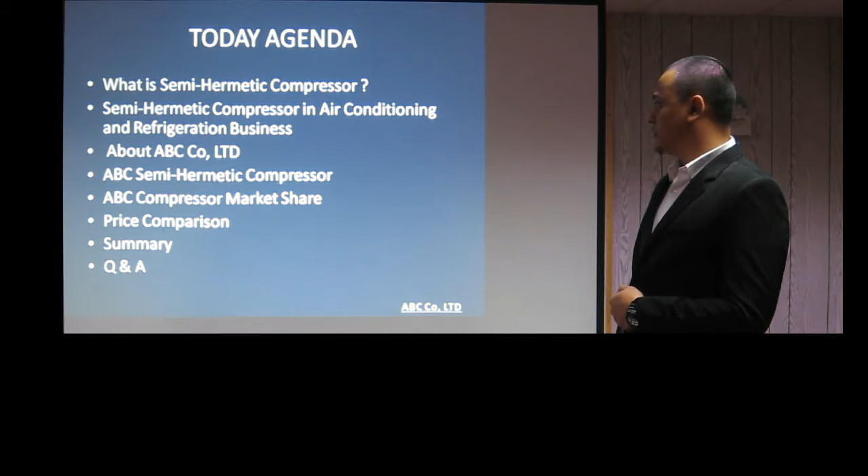Before we start, this is today's agenda. First, what is the semi-hermetic compressor? Second, the semi-hermetic compressor used in AC and refrigeration business. Next, what is ABC Co, LTD? And what is the benefit of the ABC semi-hermetic compressors? The next one is ABC compressor market share, then a comparison between ABC compressors and the competitors. And the summary, and last, we have the question and answer session. Okay, shall we start?

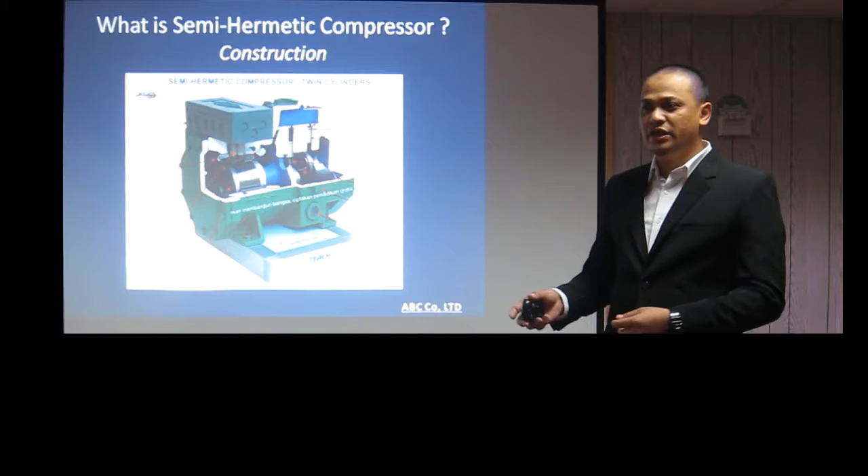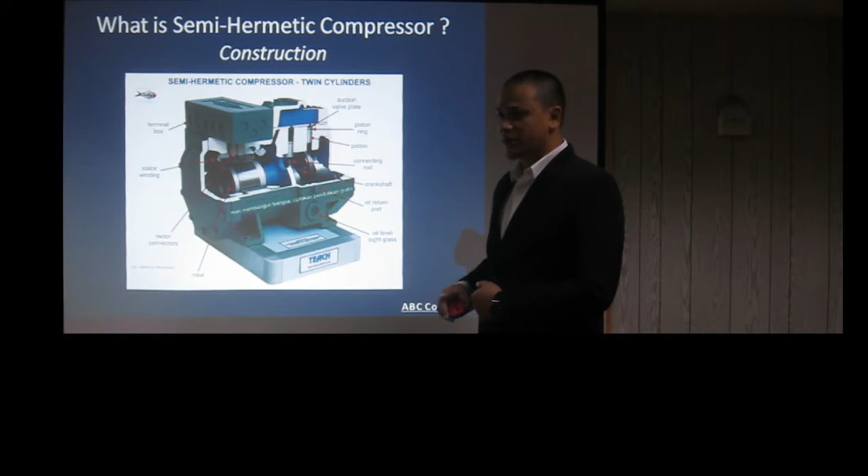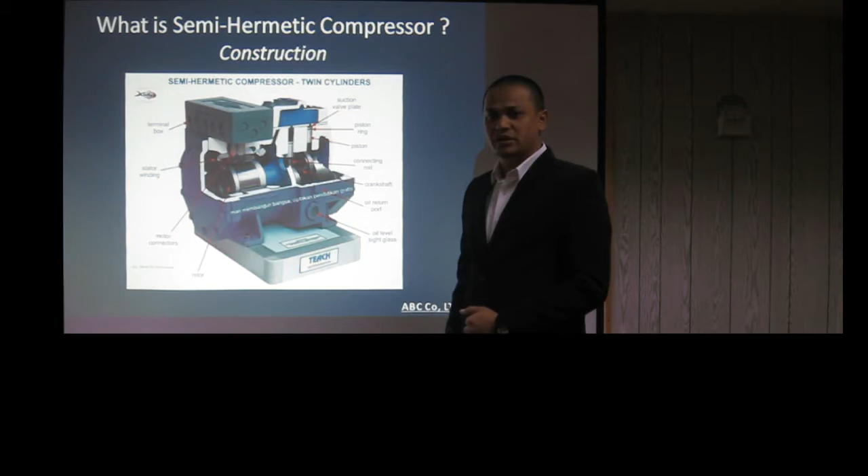Now I want to discuss what is the semi-hermetic compressor. This is the construction for the semi-hermetic compressor. Basically, semi-hermetic means the compressor's mechanical parts are attached with the motor, which is in one housing, and the housing is bolted, whereas another type of compressor is welded. So what we have here is the valve suction, the piston ring and piston, which is the mechanical part, and we have the oil sump. The other side is the motor, the driven motor for the compressor. That's why we call this one semi-hermetic.

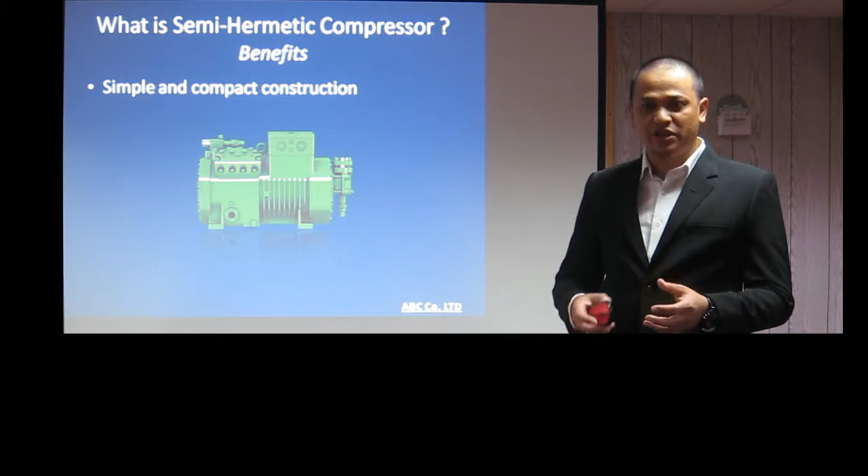What are the benefits of the semi-hermetic compressor? Of course, there will be some benefits. One is the simple and compact construction, because everything is inside one housing, so it becomes simple and compact. It doesn't take space for installing the compressor, unlike another type of compressor where the compressor and driven motor are separated. We have simple and compact construction for the semi-hermetic. This is one of the very good benefits of this kind of compressor.

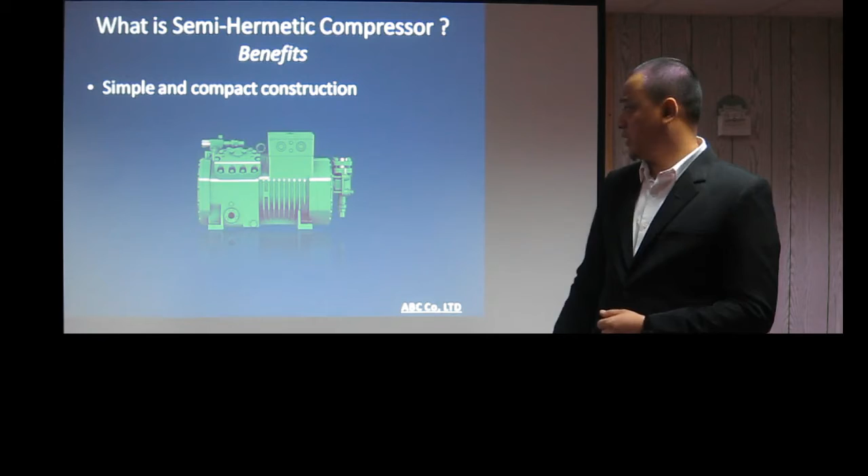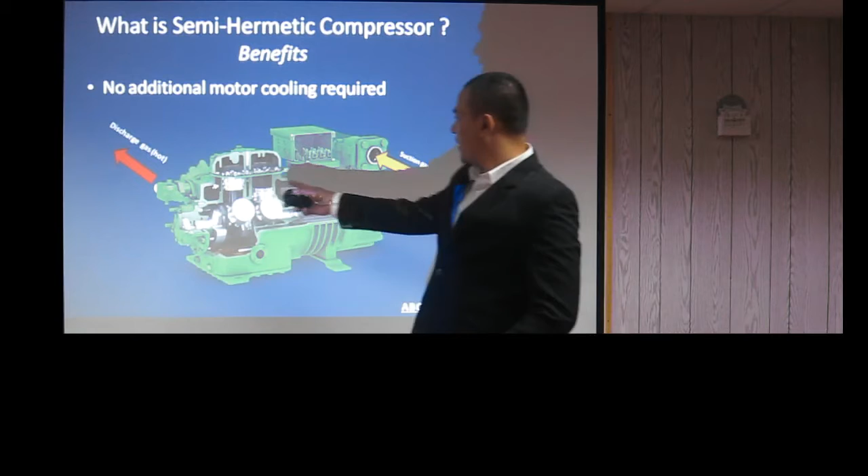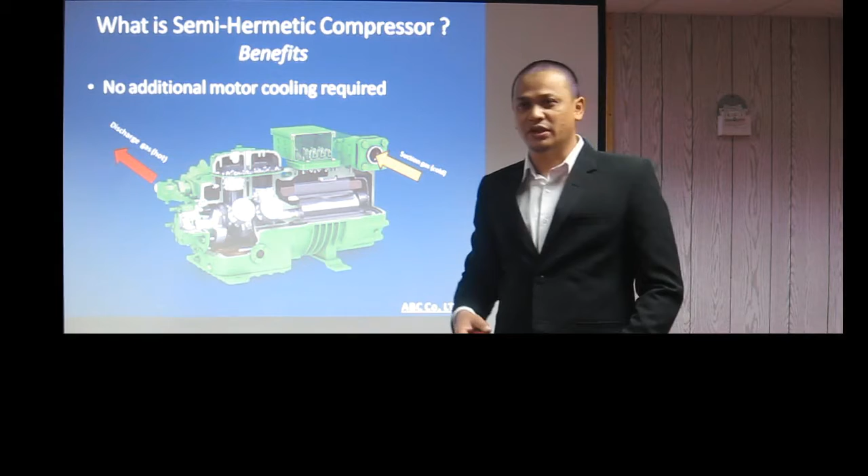The next benefit is no additional motor cooling required. As you know, for compressors where the driven motor is installed separately from the mechanical part, the motor will need additional cooling. But for semi-hermetic, this additional cooling is not required. Why? Because the suction gas, which has a colder temperature, enters first from the motor side, and is pumped by the pistons through the mechanical parts, going out as discharge gas at a higher temperature. The cold suction gas cools down the motor winding at the same time, so no additional cooling is required.

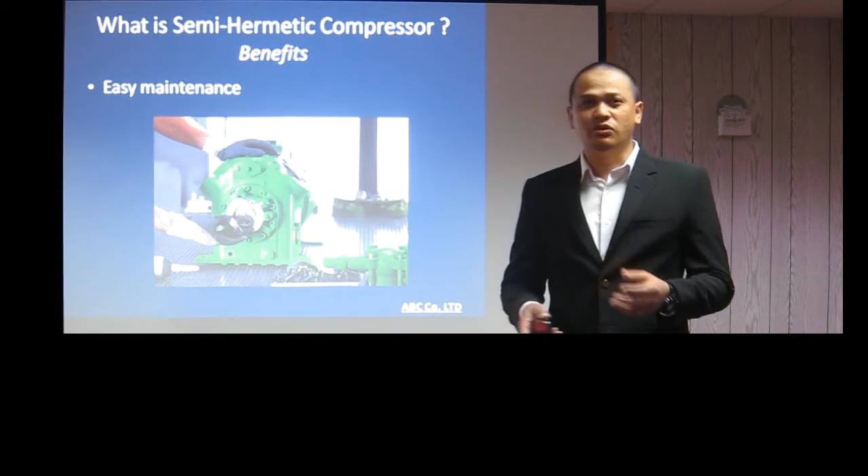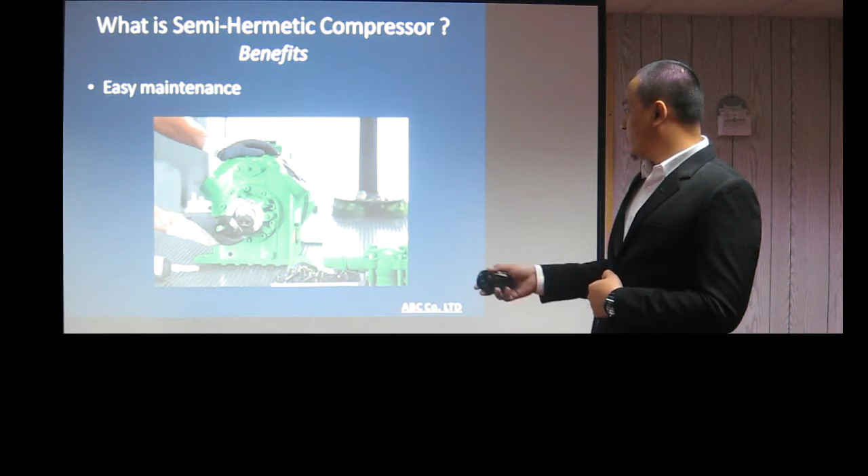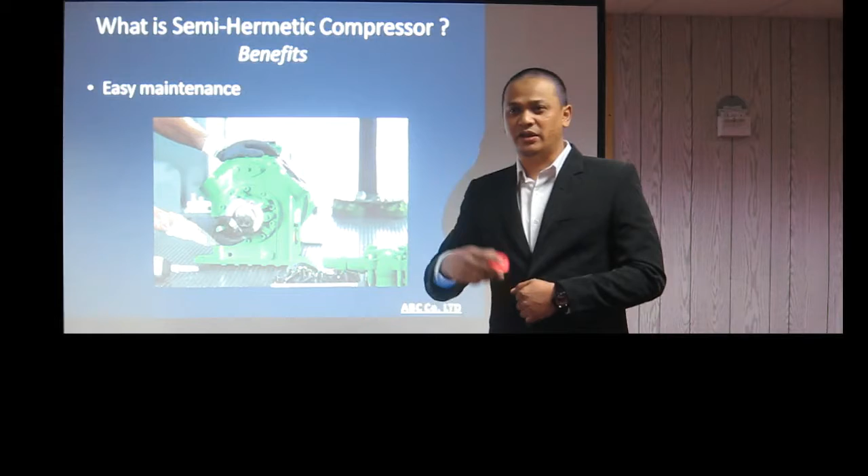The next benefit is easy maintenance, because the housing is bolted, not welded. You can do the maintenance very easily, just removing it like a valve or something else. As shown in the picture, this man is doing the maintenance. They are removing the oil pump side, even the pistons and the ring, he can replace by himself.

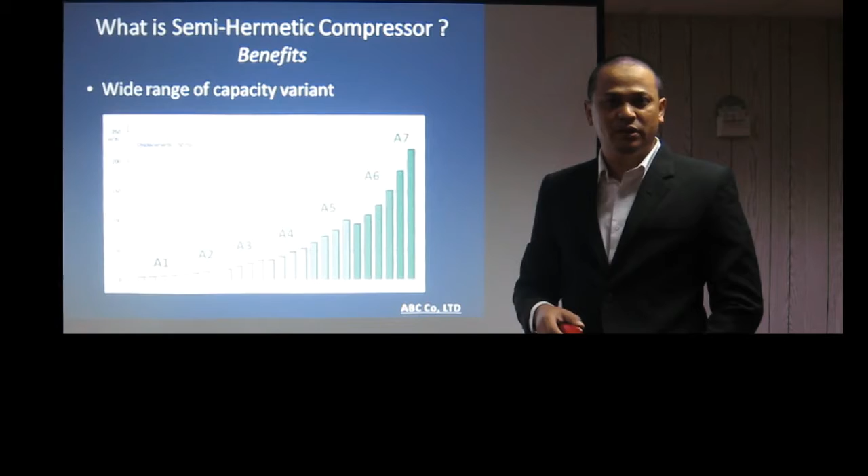The next benefit is the wide range of capacity. In ABC, as well as other compressor brands, this kind of compressor has a range of capacity, shown by its displacement. Here, displacement at 50 Hertz starts from around 10 up to more than 200 meter cubic per hour, because in the refrigeration system, displacement represents the capacity as well. More gas, more refrigerant pumped by the compressor gives more refrigeration capacity. We have several types here, from A1 up to A7.

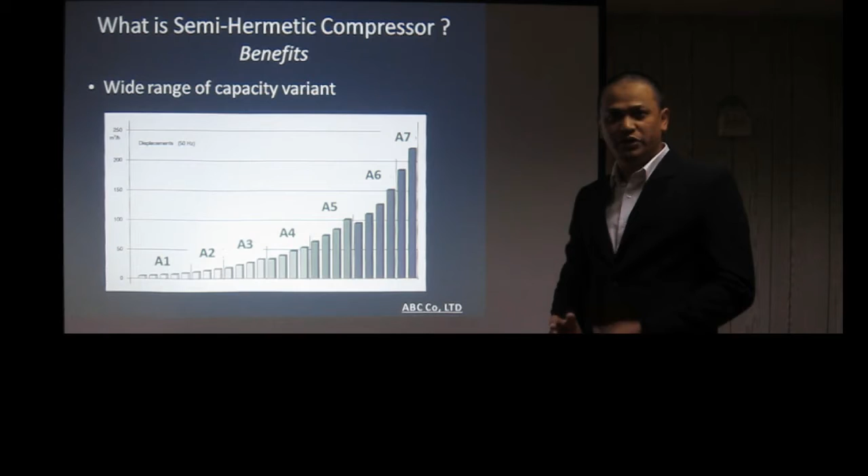Anyway, the one which I show you here is for the ABC compressor, of course. The next one is multi-applications.

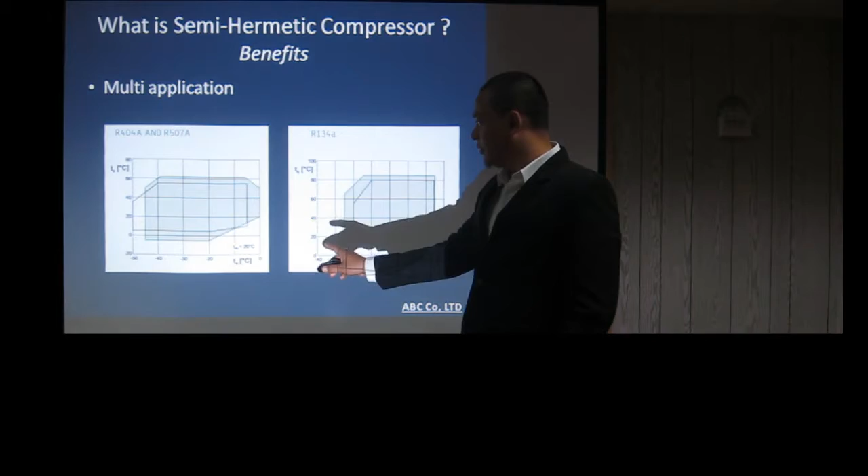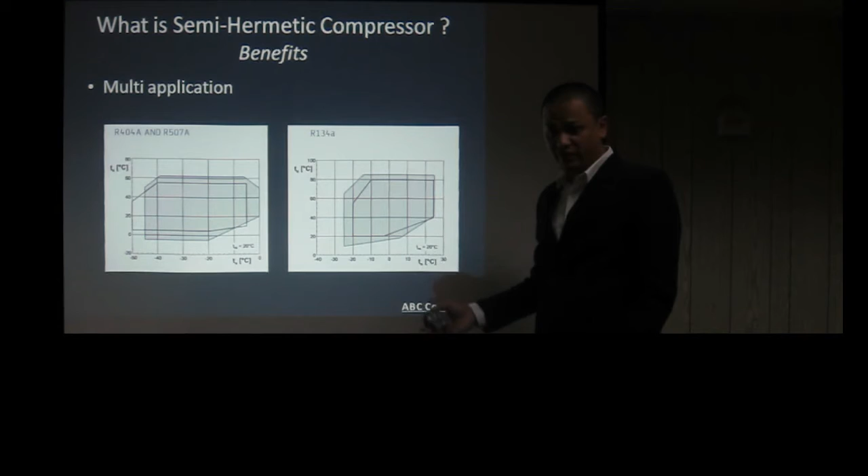We have several refrigerants, R404A on the left side, and the other R134A. R404A and R507A are for low temperature applications, started from 0 degrees up to minus 50 degrees centigrade, so we can use it for freezers or maybe as cold storage at 0 degrees. The next one is 134A gas, started from high temperature applications, around 17 degrees, up to minus 25. Semi-hermetic compressors can be used for multi-application, as you can see over here.

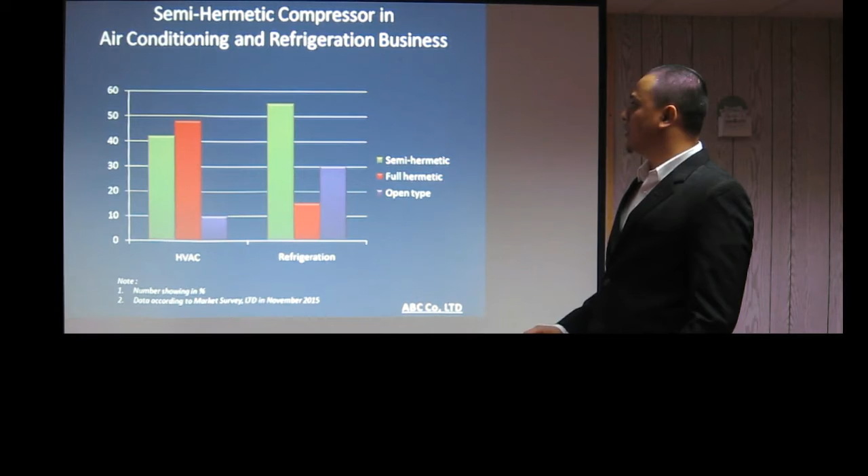Okay, then semi-hermetic compressors - how they can be used in the business, especially in AC and refrigeration applications. As you can see, we have so many types of compressors we are using. Semi-hermetic is represented in green color, full hermetic in red, and open type in purple.

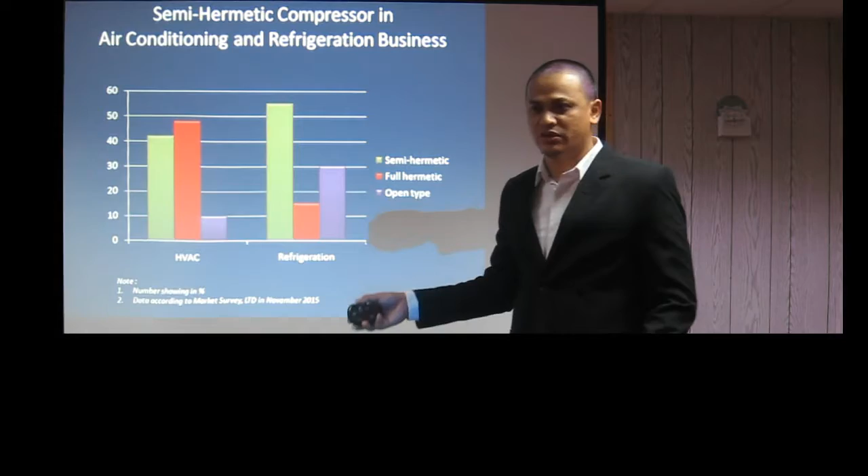In HVAC and AC, semi-hermetic makes up around 42% of the business, and full hermetic is used more than the others. But in the refrigeration business, semi-hermetic is mostly used by the user - more than 50%, around 55%, as you can see in the graph.

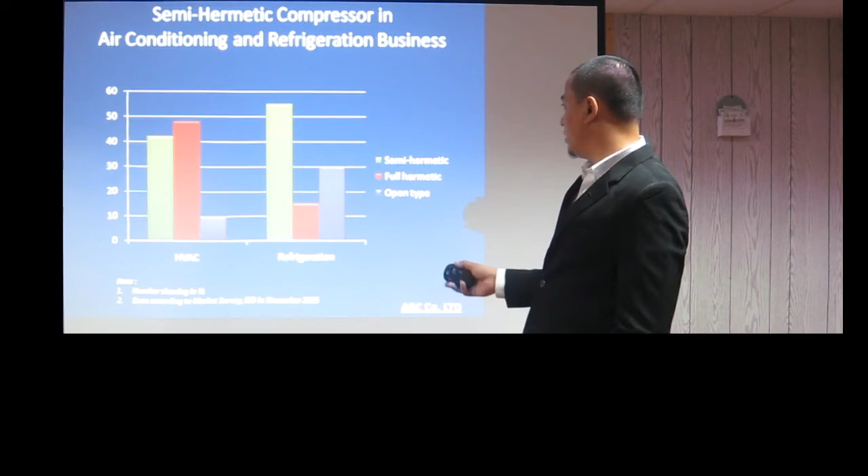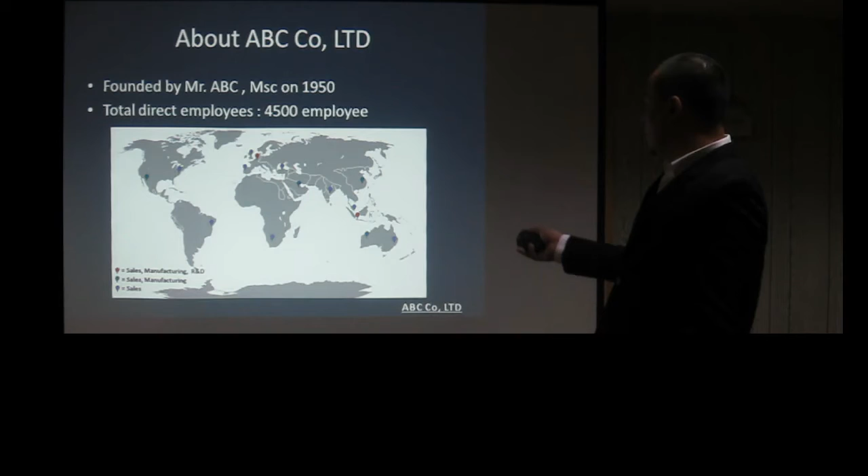I want to introduce you to where I'm working now - ABC Co. Ltd. It was founded by Mr. ABC in 1950, with a total of 4,500 direct employees. You can see we have so many offices and manufacturing sites. We have factories - around 2 factories, one in Indonesia and one in Germany.

We also have sales and manufacturing around 6 manufacturing sites around the world. As you can see here, the red one represents R&D - we have research and development sections, one in Germany, another in Indonesia, and in Chicago.

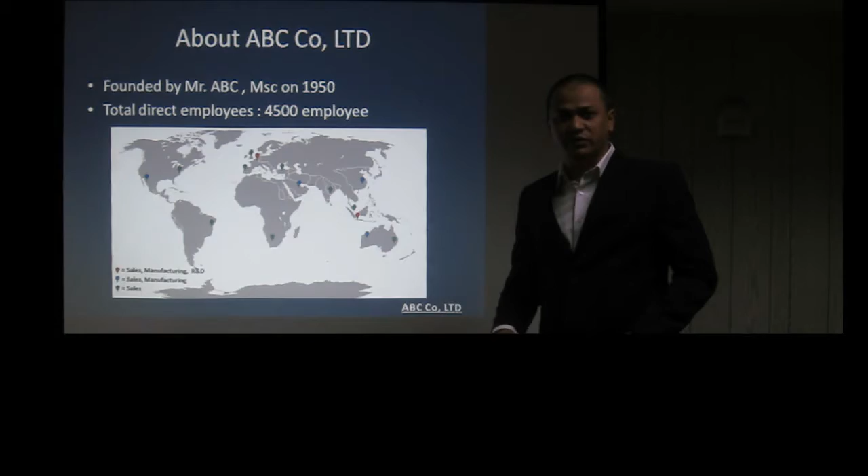The green color represents the sales office. We have so many sales representative offices around the world, so don't worry about our products.

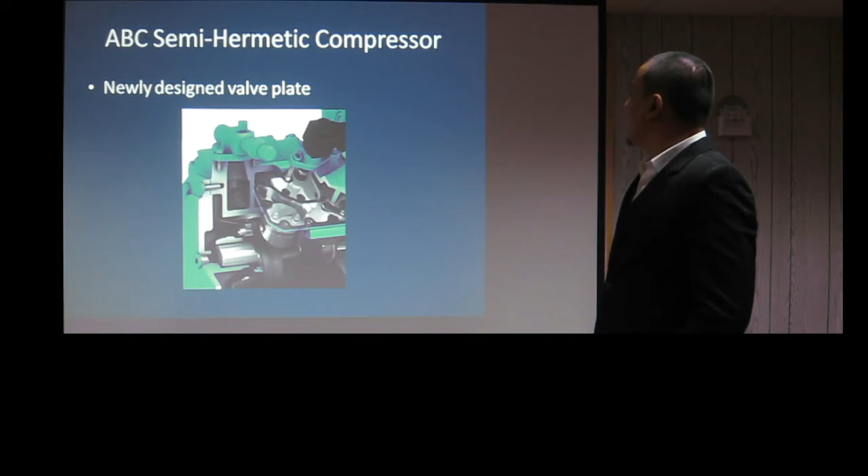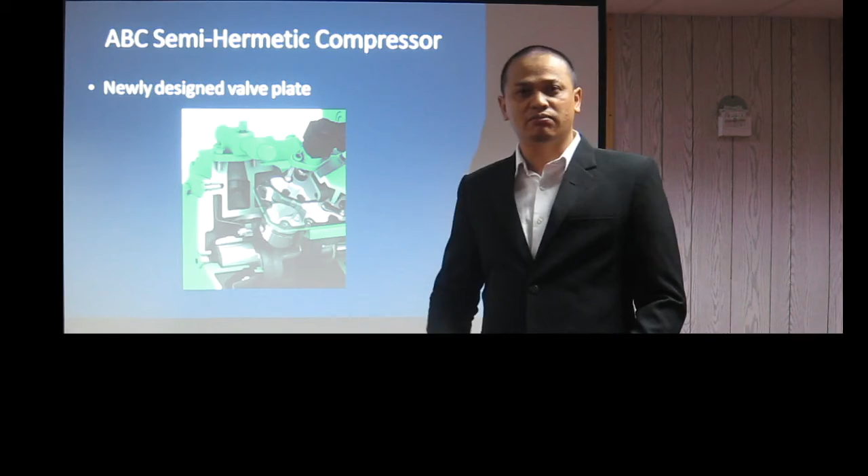The difference between our compressors and the competitors' is the newly designed valve plate. It creates higher capacity and smoother operation. The next advantage is the option for capacity control - we have step capacity control as well as variable frequency drives.

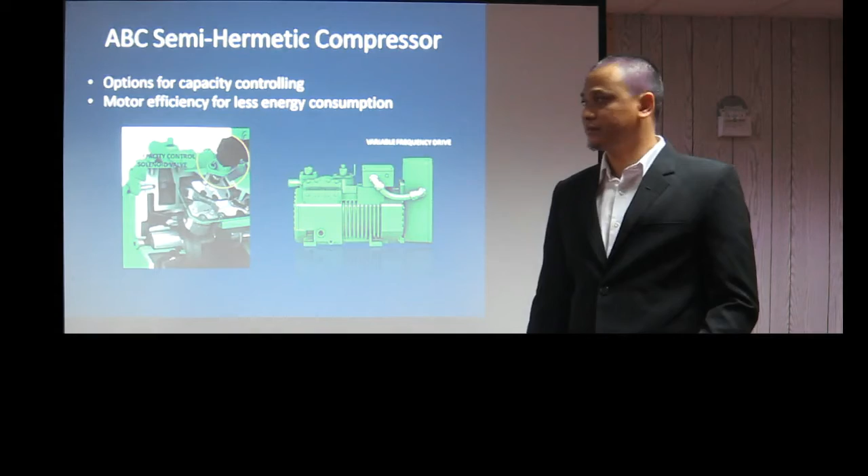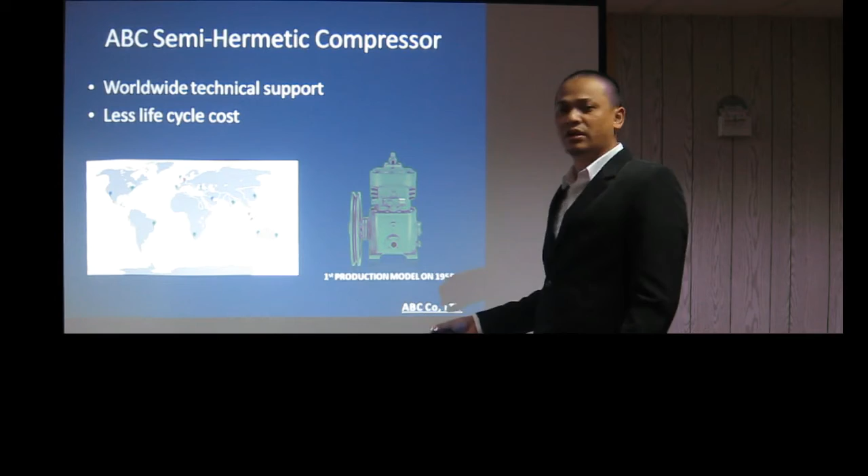Another advantage is that because we have so many manufacturers around the world, technical support will be there, and it results in less life cycle costs. As you can see, this is the first production compressor, and more than 55 of these compressors are still working up to now.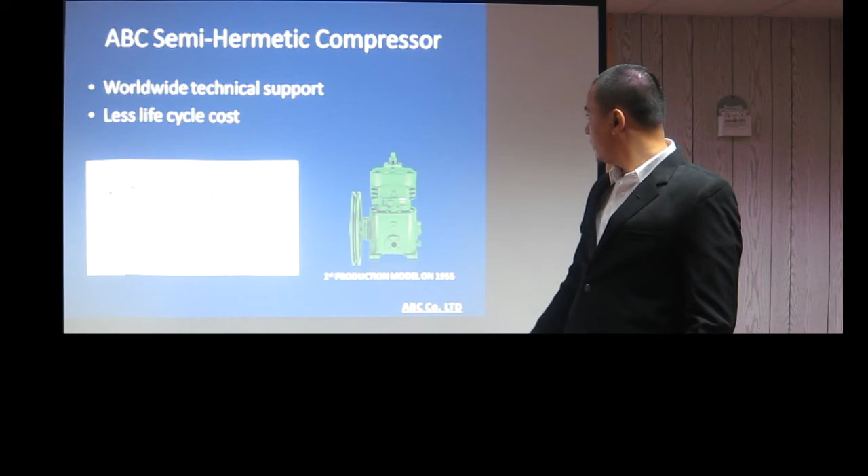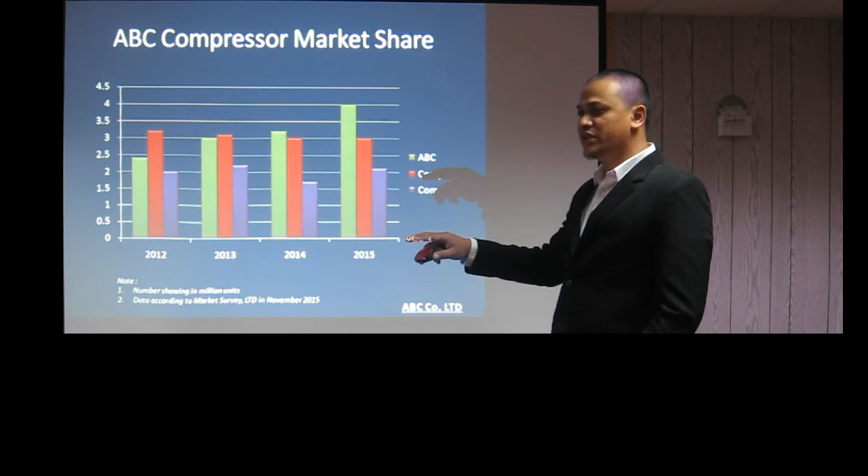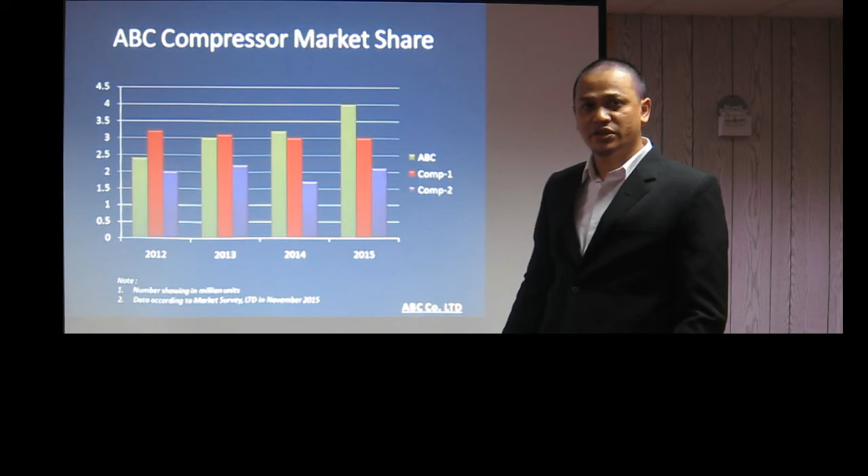Now let's look at our market share. Between 2012 and 2015, as you can see in the graphs, our market share is increasing. In 2015, we sold almost 4 million units around the world, and our pricing is lower than the others.

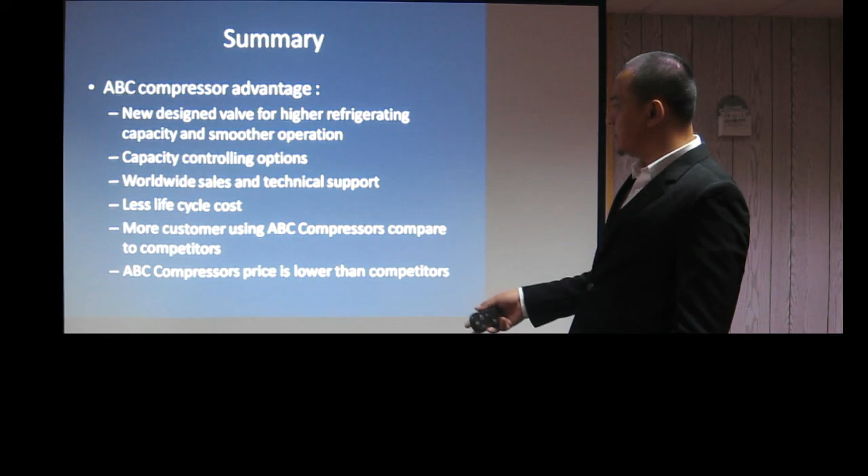Anyway, the summary is about the ABC compressor. We have more advantages, as you can see over here, that I told you already. The most important thing is we have lower price and good quality.